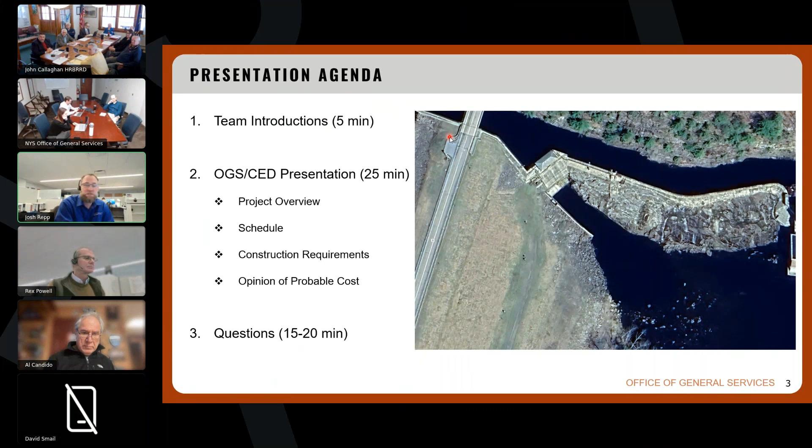So let's start off with just getting familiar with the site. This is a drone photo from above the roadway near Conklingville Dam in the background, and certainly a key feature to the site is the EJ West powerhouse. We are not doing anything as part of this project with that powerhouse, but it's certainly a notable feature at the site. Coming from the powerhouse toward us in the photo is what we'll be terming the spillway. This has a concrete cap where my cursor is, founded on a pretty large rock mass foundation. And of course, the spillway is fed by the spillway channel here, off to the left of the photo.

In the foreground, and we'll be talking about this a lot, is the outlet structure. So there's a control house on top that's a pretty characteristic element of the site, and then a really large gatehouse that goes all the way down to the floor of the foundation here. The tail race is the water body in this area here. I'll be using that term through the presentation. And then there's a retaining wall that runs along the foreground of the photo here, which works to retain the hydraulically filled embankment that's off to the right of this photo.

And I'll be spending a little time too talking about this valve access shaft. We'll be doing some valve work as part of this project. There's one way in and one way out to get to those valves, and it happens to be right here. So I'll be sharing some photos of that as well.

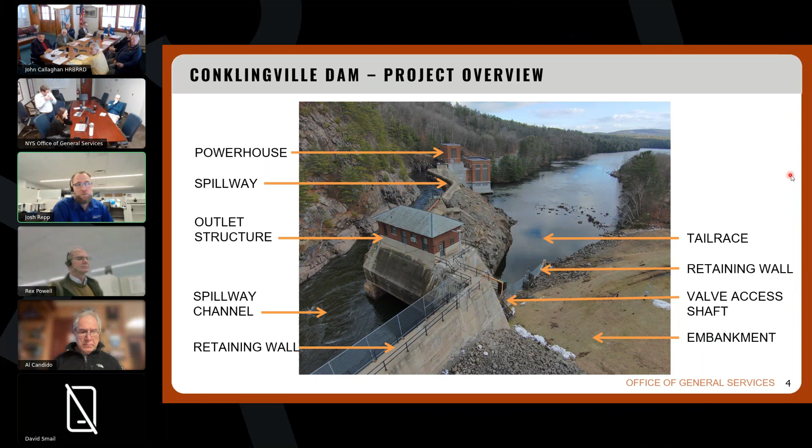Looking at the spillway, we have a concrete cap monolith structure that sits atop the rock mass foundation. The district had a log sluiceway here in the middle of the photo, that's since been filled in. As part of this project, there's a service bridge that goes out to that log sluiceway, which is no longer needed, that we'll be removing as part of this project.

You can see some of the conditions with both the rock and the concrete. The concrete in general at this site went through a major rehab in the mid 80s, and there are some issues with some of those concrete repairs that were done prior. For example, the concrete has alkali silica reactive nature to it, so that's something we'll be looking to address as part of this project.

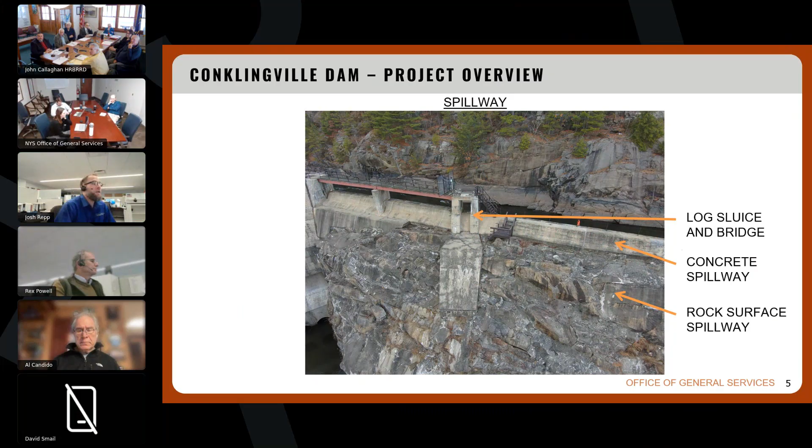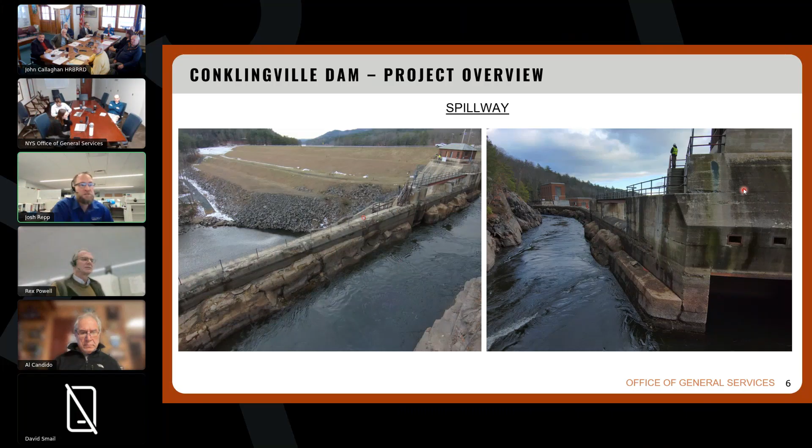Looking the other way on the spillway, you can see the embankment dam in the background, the outlet structure here, but more photos of the condition of the spillway. You can see some deterioration of the concrete. Again, that concrete sits atop a rock mass foundation that has a layer or a liner of gunite. You can see that here and here as well. That has some deterioration to it, and you can see some general deterioration of the concrete surfaces as we approach the outlet structure.

Looking downstream to upstream now, you can see the control house atop the outlet structure. A lot of the focus of this project is on this outlet structure, which is why we want to familiarize you with it and show you the nearby elements.

There's the 3 valve ports. You can see at least 2 of those valve ports are 8-foot diameter here, an element to the gatehouse. There's basically 3 ways to pass water through this dam: one is over the spillway, one is through the EJ West powerhouse, which is off the screen, and the third way is through this outlet structure and these 3 8-foot diameter valve ports that you can make out in this photo. I have another photo of it later in the presentation.

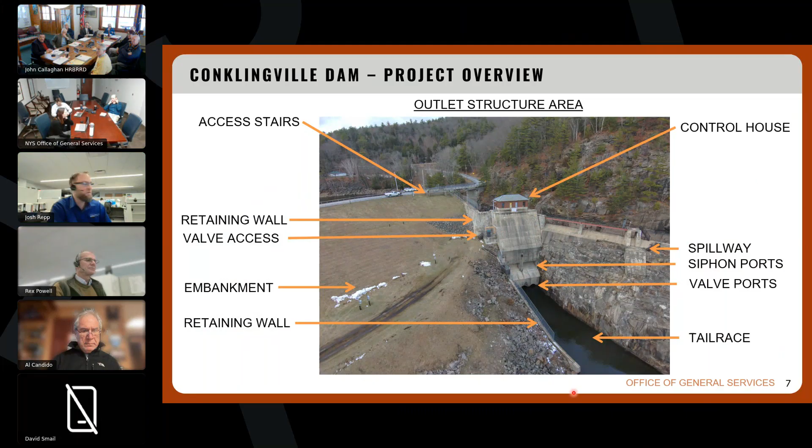There's a tailrace here. The access to that valve chamber I mentioned before is in this vicinity. And of course, this retaining wall is really critical to support the embankment off to the left of the photo. I'll make mention too that this is all accessed by some stairs that come along this retaining wall area, which I'll cover in a future slide.

In this slide, you can see the condition of some of those stairs, which have settled over time. These were put in as part of the bridge replacement project that the county did around the year 2000.

Here you can see the downstream face of the outlet structure, those 3 8-foot diameter valve ports here. There's actually a siphon system incorporated in this outlet structure as well, the retaining wall off to the left side, and some of the condition of the rock foundation mass off to the right.

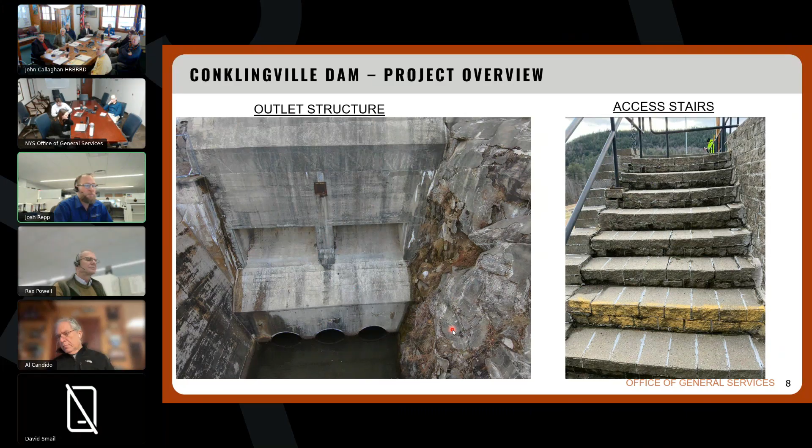I mentioned we do a home in on the valve access because that's really critical here. We need to get down to these valves. They're what's called Dow valves, and they're 100 years old or very near. If you're top side, you'd have to go down through this access hatch. You can see the blue stairs that show up in the middle photo here, and you've got to go down several flights of stairs to get to this room where you can see these 3 gauges that tell us about the position of the valve, open or closed.

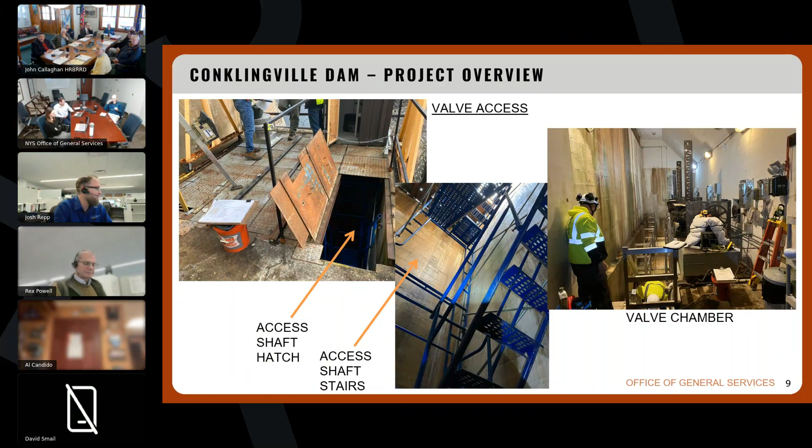You can see 1, 2, 3 valves in a very confined, spatially constrained space with some mechanical and electrical components. It's also very wet down there, and there's some leakage mitigation measures that we want to incorporate in this project to help dry it out. There's not a lot of room, and the valves are fairly sizable. They cannot be throttled; they're either pretty well full open or full closed. So the valve type also comes into play when we consider those remedial measures for the valves.

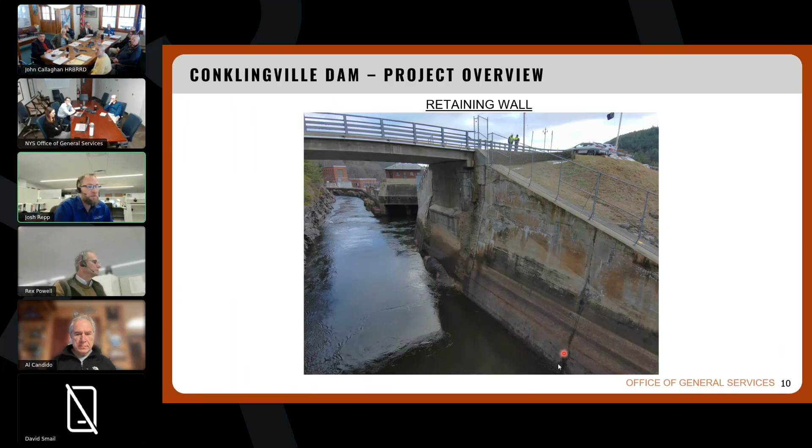Lastly, to familiarize you with the remainder of the site, there's the bridge. Again, this was replaced around the year 2000 by the county, but you can also see this retaining wall that holds back the embankment to the rear of the photo has some concrete repair issues that we'd like to address. It's characteristic to see a little bit more advanced deterioration around the bridge where we might have de-icing salts, but then also some deterioration around the monolith joints that we'd like to address.

So let's talk about what our repair plan is for the project. And of course, we're pretty well through final design at this stage.

The drawing you see on the screen, which might be difficult to read, is a work item list that outlines everything we plan to touch or improve as part of the project. We've boiled that down to the 4 primary areas you see off to the left here: a lot of work going into the spillway, a lot of work going into the outlet structure, the retaining walls, and some work to the embankment.

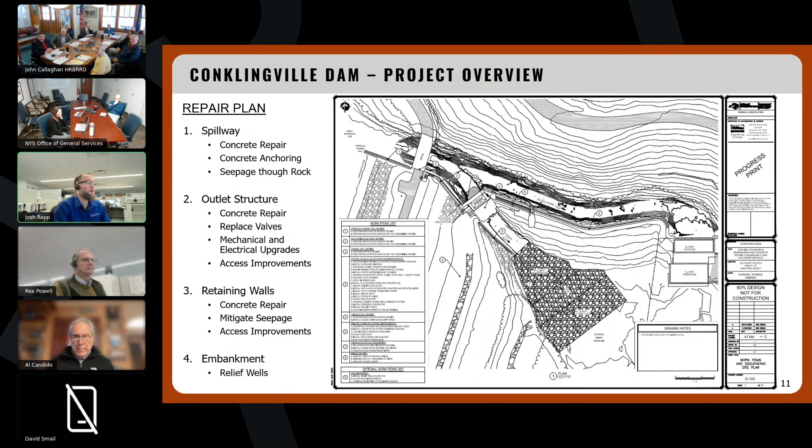I'll go through all those here as part of this presentation, starting with the spillway, which is highlighted. You can see a plan of that spillway going between the EJ West powerhouse here and the outlet structure here.

There's removal of the service bridges I had mentioned out to the long log sluiceway. We've done a stability analysis of this concrete cap and determined that it needs anchoring in order to be more stable. These little black dots you see along here are vertical anchors.

We'd also propose to resurface the spillway, get rid of some of that ASR prone concrete that was put in the 80s, and put in a more robust concrete cap. We're also proposing to drill down through this cap and put in a grout curtain, which you should look at as a grout wall within the bedrock foundation, to mitigate seepage and fill any voids or fissures within the rock surface.

There's also some concrete improvements that we are planning for both the upstream and downstream side of the spillway.

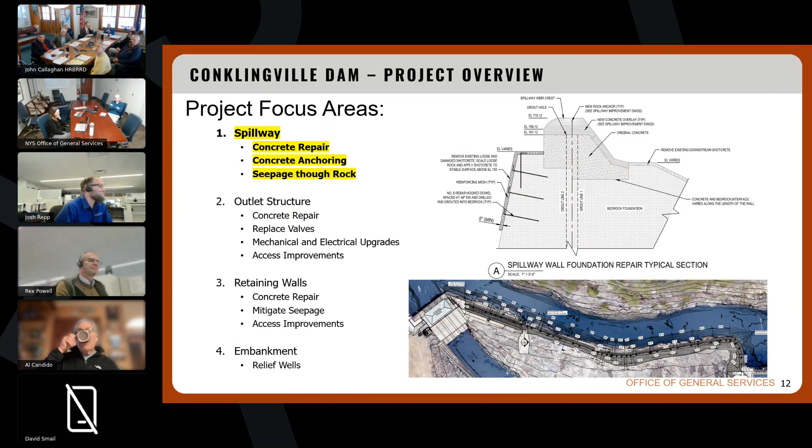The outlet structure looks like this, and this is looking from the downstream view to the upstream side of the dam. You can see the control house here, these are 2 siphon ports, and this is the vertical shaft you would go down to get into the valve area. I'll zoom in on all this line work because it's difficult to see, but basically this is a 10 by 10 shaft.

We have to get the old valves out and install the new valves. You can imagine if you have an 8-foot diameter valve and this is a 10-foot shaft, that things are very spatially constrained to get things to fit up and down that vertical shaft. And valves are very heavy.

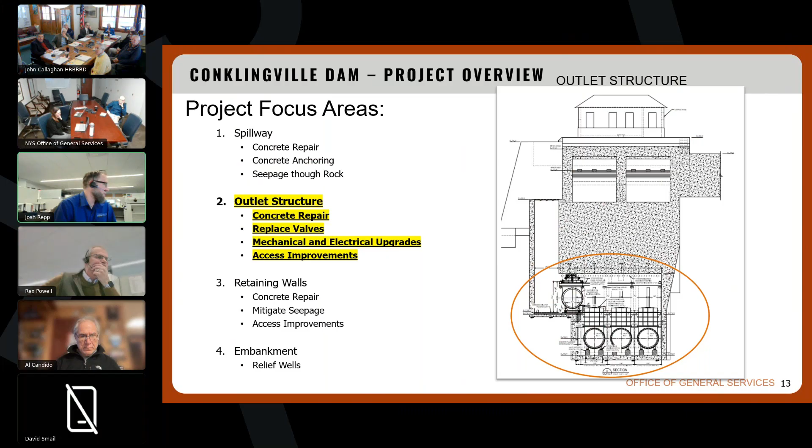We can drop that down via crane here, but we are proposing to incorporate a trolley or cart system to which we can move the valve body, and each valve will come in 2 pieces. It'll have the main body of the valve here, but also a bonnet that sits on top that allows that blade to come up vertically through the valve assembly. Once that piece is put on the cart and moved from here to here, we then incorporate a whole overhead crane in order to move it laterally and up and down.

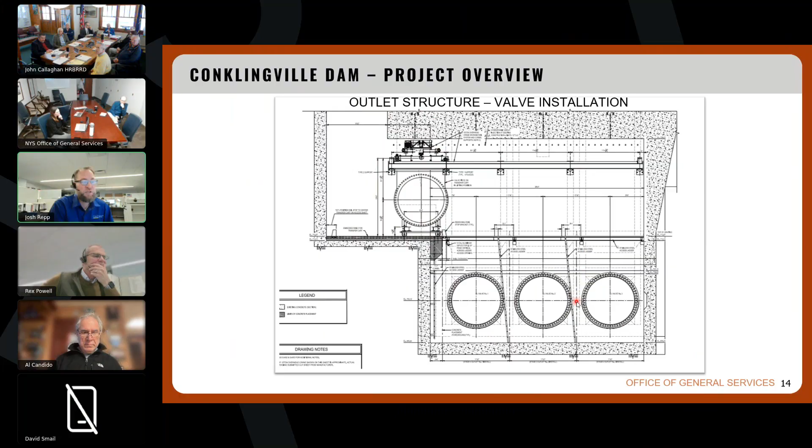I want to make the point too that we can't just replace all these valves at once. We need these valves potentially to operate during the work, so we'll be doing them 1 valve, then 2 valve, and then a 3rd valve in a particular sequence. There's not a lot of space, maybe only a foot or 2 between these valves.

So with the spatial constraints we have in the outlet structure, we did develop a 3D model, done in Civil 3D, an Autodesk product. The image to the left is a cross section of the outlet structure.

We're proposing to line the 8-foot diameter port down to about 7'6" with what you see in gold. The replacement valve is the red assembly here, and you can see the 2 pieces to that, the lower piece and the upper piece being the bonnet, and then there's a stem that runs up vertically. The roof of the outlet structure is shown here, though the overhead crane isn't shown in this particular image.

We're proposing a new staircase to get down into that valve chamber, an updated access hatch here, and then a small house structure that you could walk into to better access the valve chamber. That's shown here as well with the image off to the right.

This is looking from upstream to downstream, and you can see the 1, 2, 3 valve bodies. There's a lot of piping and other things going on in these images, but they show the complexity of the 3D model.

These are isometric views of a similar thing, showing the same image. We turned off all the existing line work on the image to the right. But you can see the gold liner, the 1-2-3 valves, the overhead crane in this vicinity, the staircase, the trolley system that transports valve components laterally, an access hatch, a small hoist for servicing and getting equipment up and down, another access hatch, and an access house. That's the makeup of the outlet system.

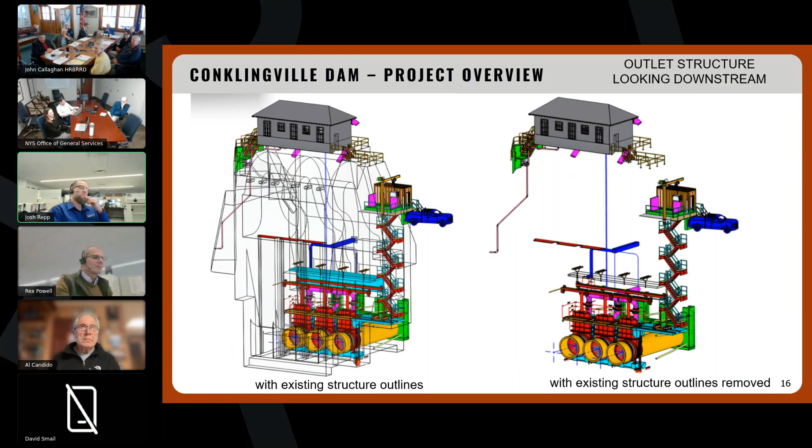We've designed the area such that the new staircase, which is on the downstream side, would be reconfigured. Right now the stairs are closest to us in this slide. We're repositioning them in a different orientation on the downstream side of that 10x10 opening, which gives us about a 5x10 vertical slot to drop that valve body down, shown right in this zone. So yes, we want a safer, more permanent stair system than what's out there now—the existing one's adequate, might meet code, but it's not very permanent either.

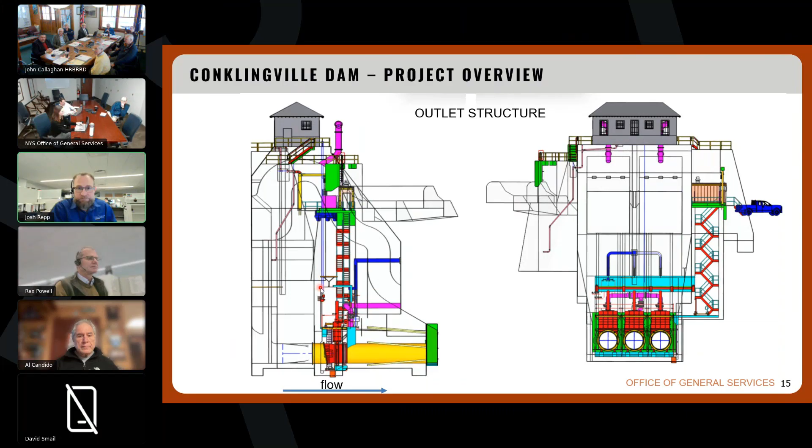The new stairs would also help facilitate getting workers in and out of the workspace. I think this would all go in, and then we'd start dropping valve components down right next to it. Did I answer your question? Yes, thank you. You're welcome.

So I think I'm on retaining walls. Compared to the spillway and outlet structure, they're quite a bit more simple. Here we're basically proposing a reface where you see the yellow areas, addressing the superficial deterioration we see. We'd like to do some seepage mitigation measures along this length, in particular this zone, similar to the spillway, where we drill down through the concrete and grout up the rock mass. We'd like to do that along this retaining wall because we have a foundation interface, and we want to make sure the spillway channel isn't leaking into the earthen dam. So there's seepage mitigation measures, concrete repair, and access improvements to address the settling stairs I showed a photo of before.

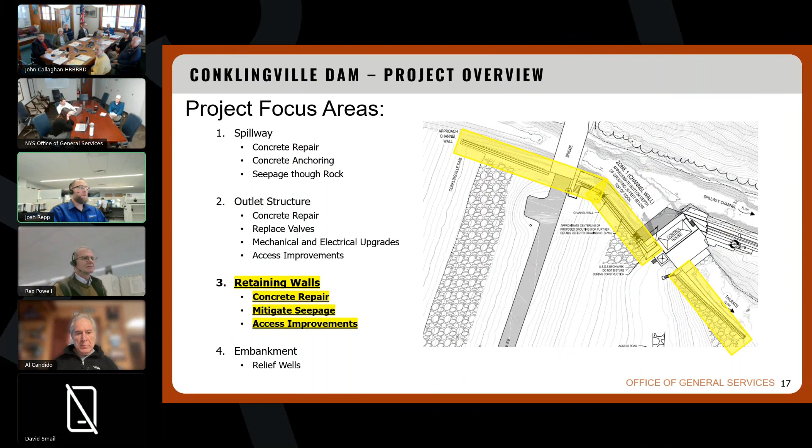Lastly, some embankment improvements, not a lot of improvements. We had wavered in our prior studies on what improvements exactly this embankment might need, but through a lot of geotechnical and soils engineering, we've come up with a seepage model. This is a cross section of the prism of the dam, and we looked at the phreatic surfaces, the flows through the dam, and have identified that we think the only improvement needed for this project would be a relief well system.

That would be at the very toe of the dam. The road is here, and this is the riprap along the downstream side of the dam. There's a couple of access roads, so we're at the very lower access road where we're proposing to put in 5 relief well systems, and that would help alleviate some of the internal pressures within the dam.

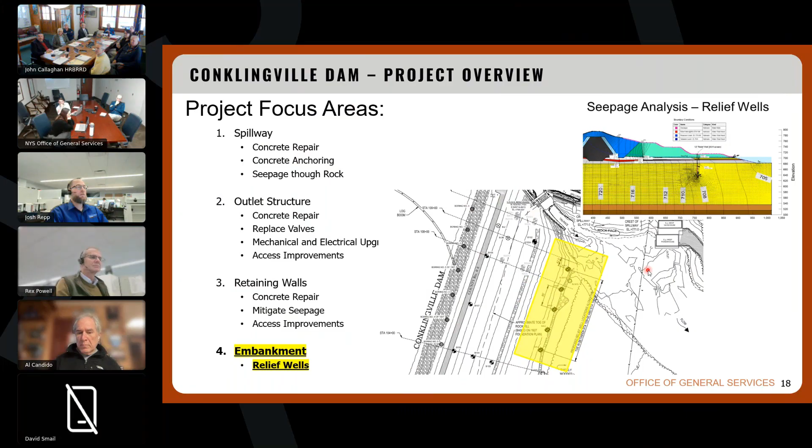One additional thing we're focusing on that I didn't mention in my prior slides is we're evaluating this particular zone here that you see circled, and this is a plan at the site in the Tailrace area. You can see some large rocks in the Tailrace area here. We believe they were once probably located within what we're calling a scour hole. This is not a hole in the dam, I want to clarify. It's immediately downstream, but in the vicinity of the dam, so we're paying closer attention to it. It's about 20 feet deep, as you can see here with some of the bathymetry.

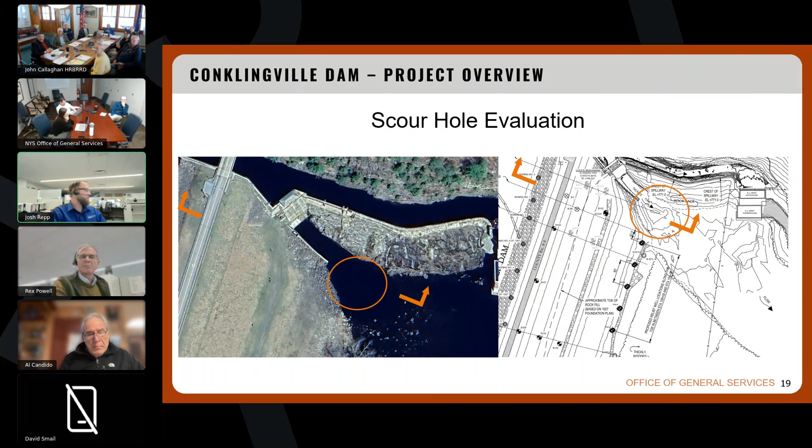If I were to take a cross section through the dam along this particular area, you would see this. Similar to the last slide, the dam is made up of different materials, whether it's rock fill, granular shells, or core materials. We have a layer of fine sand that sits under this whole dam, and it just so happens that at this scour hole, the fine sand touches the scour hole, and because fine sand is a material that could be transported, we want to make sure that fine sand stays put.

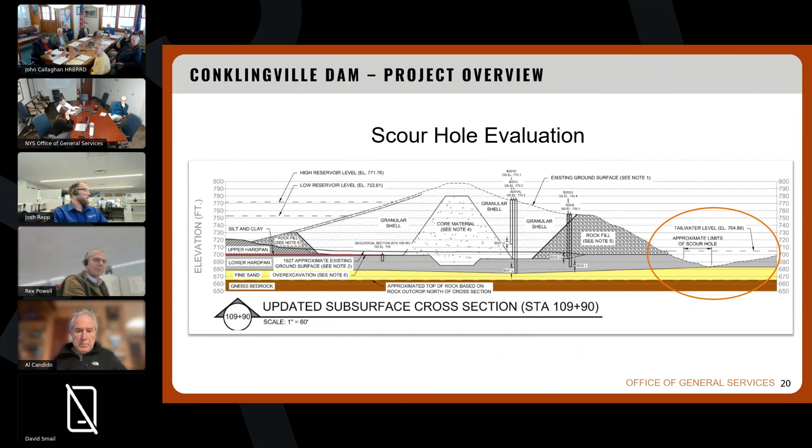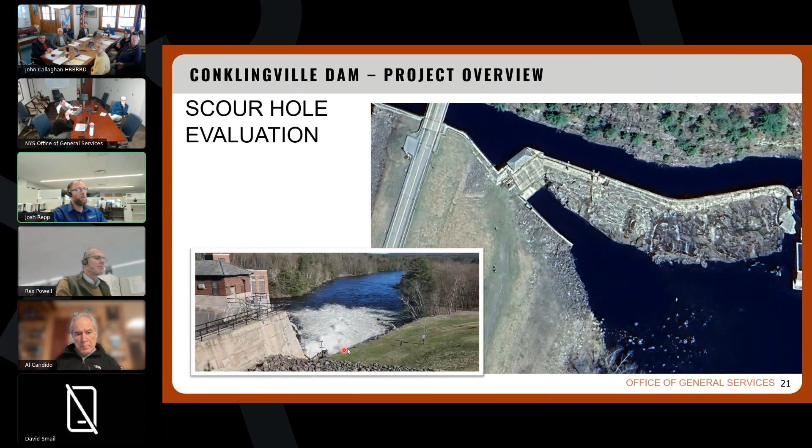So we're doing some modeling. Again, we've got the 3 valves that are in the outlet structure. When those operate, they can be a little bit violent over that scour hole area. You can see some of the turbulence within this photo. We're using computer modeling to look at the velocities when these 3 valves might be open. Now, very rarely are all 3 valves open, but when all 3 are open, it does show a whole lot of turbulence above that scour hole area.

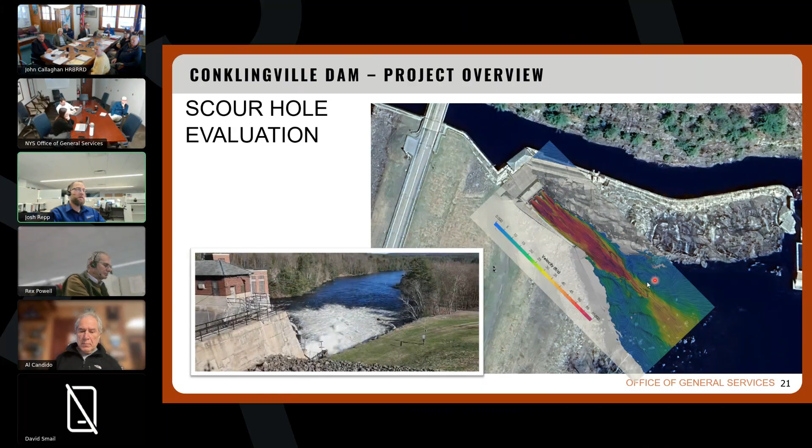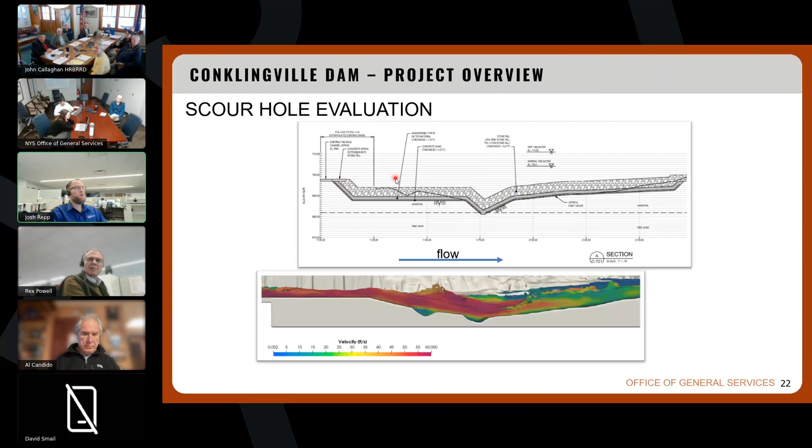So we're looking at using this modeling as a tool to gauge the improvement over this scour hole area. In cross section, the valve flow would be coming from left to right, and you can see some of the turbulence. This dashed line represents the fine sand layer down here below a hard pan layer, and we're looking to use some riprap improvements in a layered fashion, because the fine sand needs to be a filtered exit from a dam safety perspective. So we're paying attention to this area as we progress to design.

Would like to move on to discussing schedule.

They've requested that we meet with them in the springtime to discuss the elements of the project after they've had a chance to review it. We will then go through a design potential failure mode analysis, just to make sure anything we do to the dam during the remedial measures isn't posing any dam safety risks. Once that coordination with FERC is complete, we'll issue final documents, go into a bid period in the summer of 2026, award to a construction contractor, and then we've estimated about a 3-year construction duration for completion in the summer of 2029.

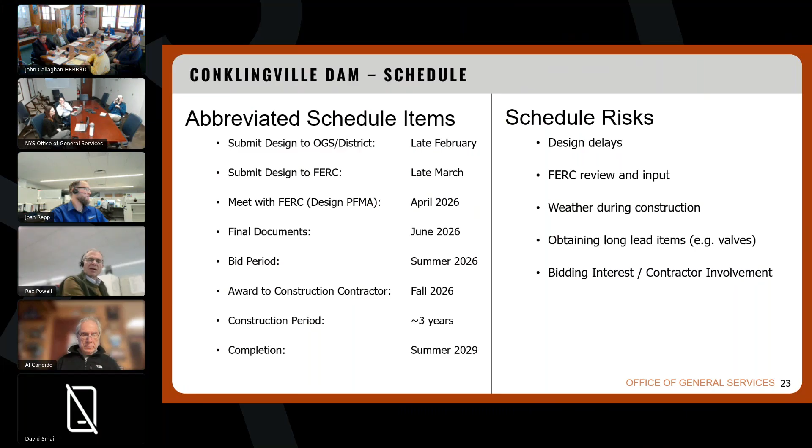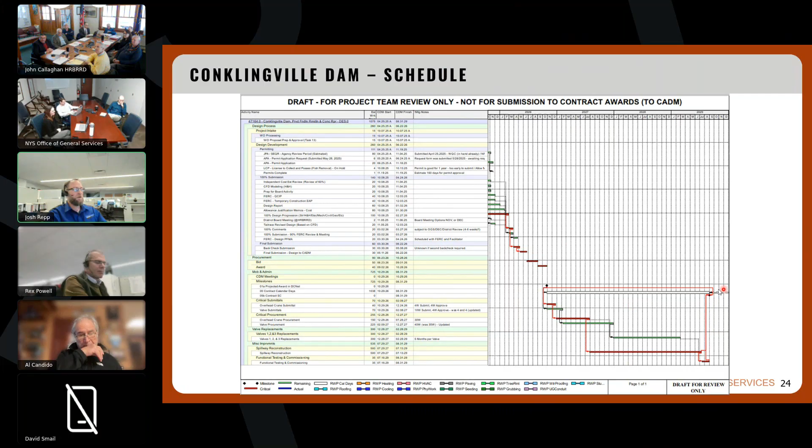We track our schedule in a P6 schedule that you see here on the screen. The top half is more design-related tasks, and I realize it's difficult to read, but I want to show you that we're putting a level of detail in tracking our schedule here. The bottom half is really that 3-year period of on-site construction.

I mentioned construction requirements as an agenda item. What does that mean? Well, we want to do the project with a sensitivity where we're minimizing impacts at the site, whether that be noise, keeping dust down, not having a lot of light. We have to comply with SWPPP measures and make sure we're not compromising the water quality. We use things like turbidity curtains, so you should see some things out in the water to help protect the water quality, and along the site to make sure we don't have erosion issues.

We have permit requirements that, of course, we need to adhere to. That might include things like fish relocation, where we're proposing some dewatering within the tail race to work on the valves. We do anticipate some periodic roadway interruptions. For example, those stairs are really close to the road, and we might have to take a lane periodically to do some work up there, but we would coordinate that with the county during construction.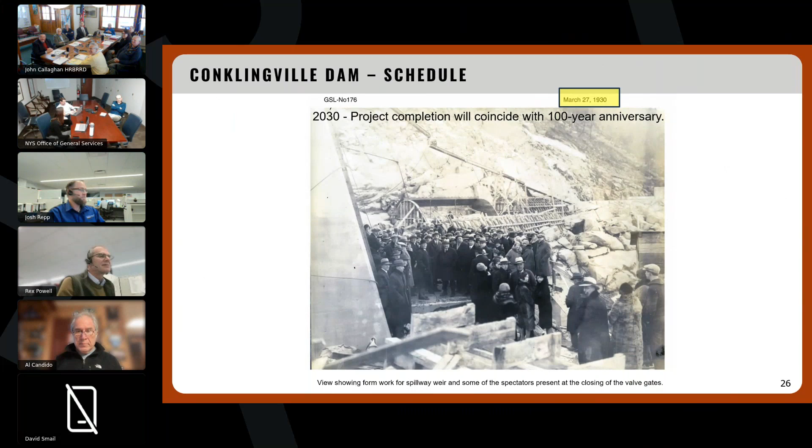That was like 1930. Yeah, this image is from 1930. I was just wondering who had a hat like that. The board members, chief engineer in that photo. You might have been from there, our collection. They were recruiting reenactors. Go ahead, Josh, and I'll close.

This is my last slide before we'll open it up to questions here. But we're, of course, tracking the cost of all this with OGS and our other partners, DEC, the district. Again, realize we have an itemized cost estimate form off to the left here, but the stuff on the right is probably the things you'd want to see. We have a base construction estimate here that we've developed. We're including what we think are appropriate levels of contingency. We have a target accuracy range that we're targeting as we approach the 100% design estimate.

We understand the importance of an independent cost review, so we've asked another firm from the outside to look at the numbers to make sure they think we're aligned with the cost. This means it's at a little higher risk of potential cost fluctuation. We've incorporated field allowances, and those are basically allowances to try to cover costs for things that we think could be variable during the work, whether that's going a little deeper with some concrete repair, or having a longer anchor because we didn't have the rock quality we had anticipated. Those sorts of things are covered in what we call cost allowances.

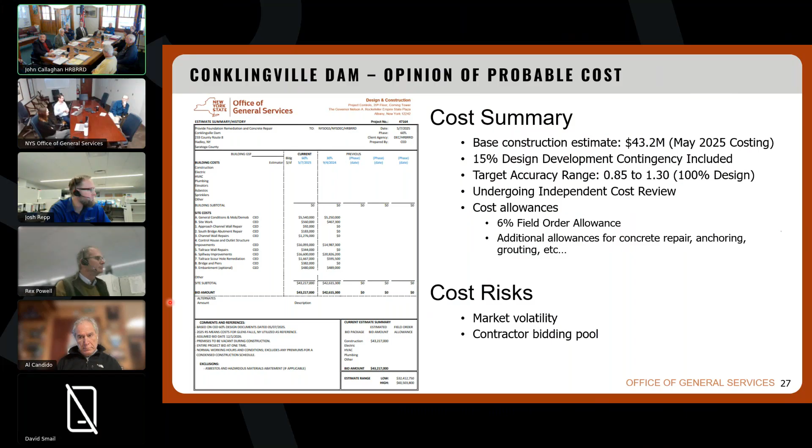Another question? I got two questions on that. One deals with this, to Josh. As you guys looked at this project and the price, and you looked at the power plant - I mean you really didn't look at it, but it's there - is there anything we should be thinking about to generate more power and help offset the cost over a long period of time? If this was a brand new dam going in, is there anything you guys would recommend as experts in this area, as far as power generation, that we at least ought to take into consideration - which I'm laughing to myself as I say, because they don't pay us money - that we should consider to help pay for the cost? And also, Josh, you can unshare your screen. Thank you, that's a good question.

This is Brady. If you want to mute for a second, I can talk to this. It's a good question. For the current task at hand on our side, we have a scope of work that we are developing and executing. If it is something the board is interested in evaluating options further for the power creation associated with the dam, I'm sure that's something the Colliers team would be able to review and assess. If that is an ask the board is making of us, we would certainly be happy to supplement our current task with an additional task. But I want to make sure, for clarity, that is not part of our current assignment, and we could have further conversation about that. Josh, if you have specific feedback on things we could do differently, that's certainly something we can talk about. But as far as the current project and assignment we've made to our team and the Colliers team, I think that assessment is not being completed at this time.